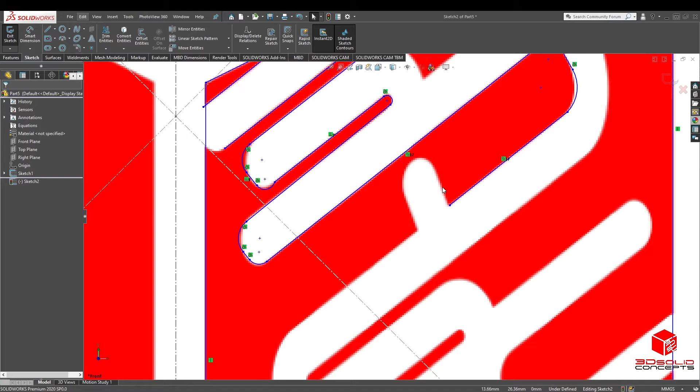This will be a series of step by step tutorials on CSWA level models. This course is also meant to help you learn a design intent methodology that will help you create smart 3D models that will make it easier for you to revise, increase your accuracy, and speed up your modeling during the examination. So, let's get right into the tutorial.

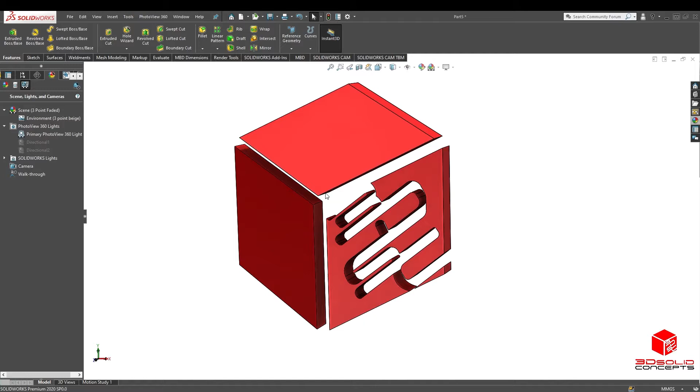What's up, YouTube? This time I chose to take off the intro and start off with just how I am right now. In this video, I'm going to show you guys how to do some offsets, some radius, and some holes in a part I think is a little bit more sophisticated than the parts we did before. So let's get right into it.

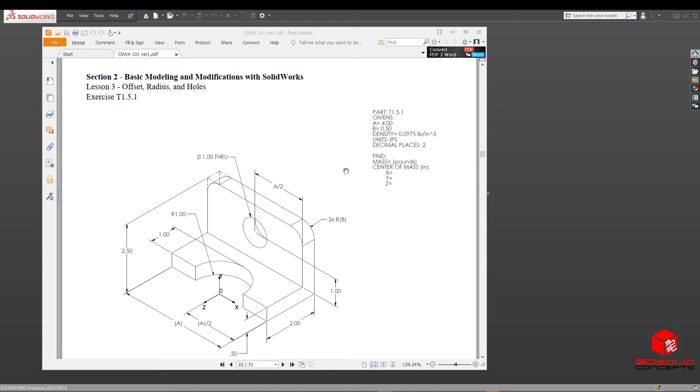So let's look at this part. We see that there's radiuses, this curved edge. We got a hole in the middle that is 1 millimeter through. Oh, whoa, actually let's hold up. This part is actually in inches and not millimeters.

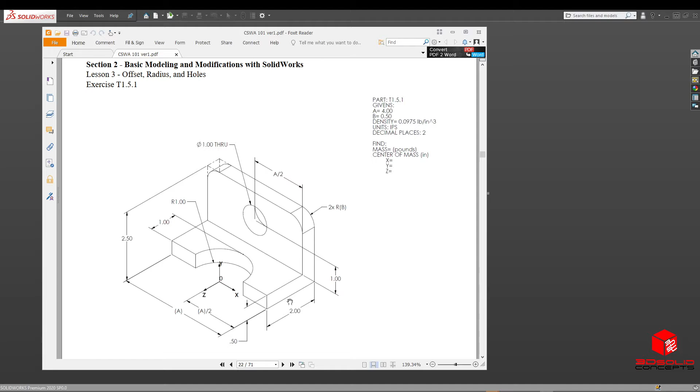So this time we get to figure out how to make a brand new template in inches. So let's start that first before we start looking into the part even deeper.

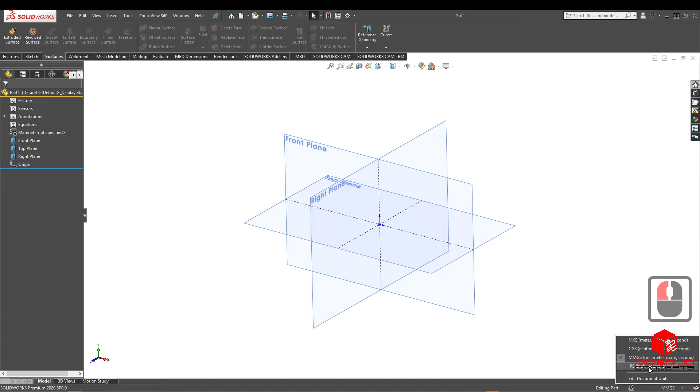So what we're going to do is File New. We're going to open our same millimeter part. Not going to do anything to it yet, but on the bottom right, you're going to change that to inch, pounds, and seconds. But that's not it. We're going to head up to settings, go up to options, document properties. We're going to head over to dimensions.

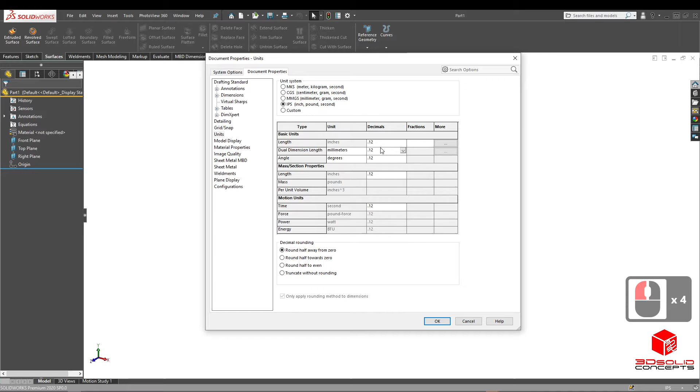Let's go to units first. You see how it's both in inches? We're going to change one to millimeters. Where are you, millimeter? There you are. Drop this down to 2 decimal places, and this one to 3. Then let's head over to dimension, and this looks all right. I think, yeah, that's fine.

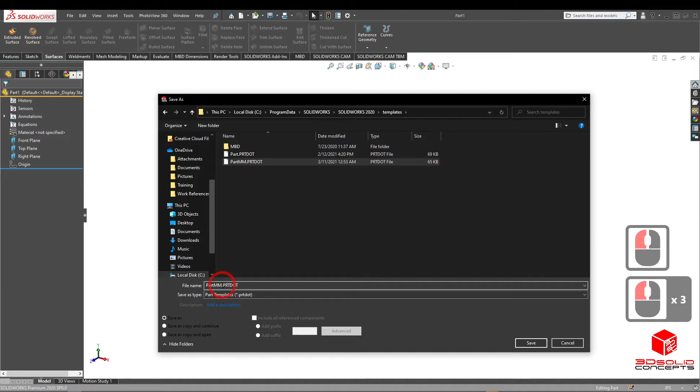So what we're gonna do is go File, Save As, and we're gonna go up to here. We're gonna go up to Templates, and if I remember this correctly, it's Part Templates right there. We're gonna take this and call it inch this time. Part inch, put a little dash there so we can separate the I and the T. Just hit save. Now let's close this one up.

Go to File, New. And we're going to make sure our part inches is there. Great. Let's open that up.

Now you finally look at the part. So this one is in inches like we've seen before. They want the mass in pounds, the center of mass in inches, and our density, and our A value is going to be 4 inches, and our B value is going to be half an inch.

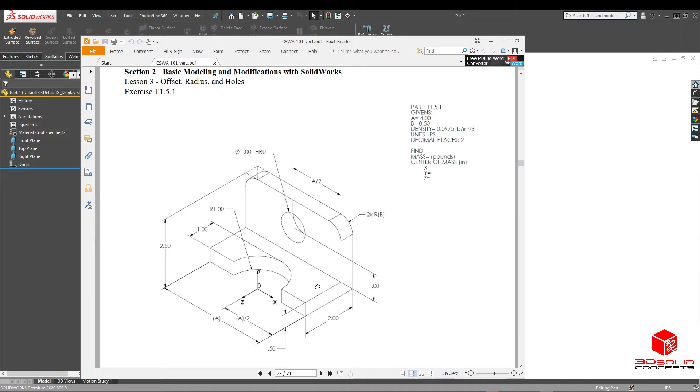So let's get into modeling this part. Quickly referencing where the X, Y, and Z is at to make sure Z is going down, X going to the right, Y going up. That looks all good. And it looks like this round piece is going to be the center of our origin.

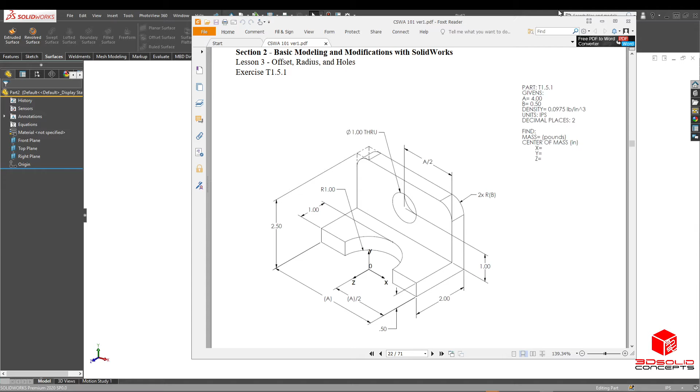So the first thing we're going to model then is this bottom base plate. Actually, let's try it one other way. I want to try doing it with this one right here. We're actually going to start with the profile and an extrude middle. So it's going to be 2 by 2.5, and it's going to be about half an inch thick.

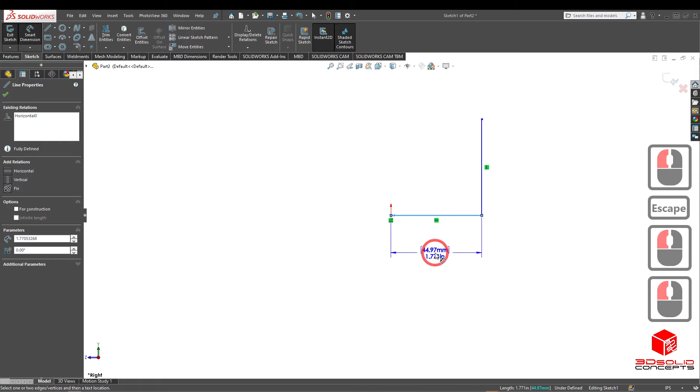So we're going to head over to our right plane. Just hide these. Go to our basic sketch, and I want to show you guys 2 tricks right now. This gives us some dimensions. I'm going to give one 2 inches. Actually, yeah, 2 inches. And then the other one's 2.5 inches.

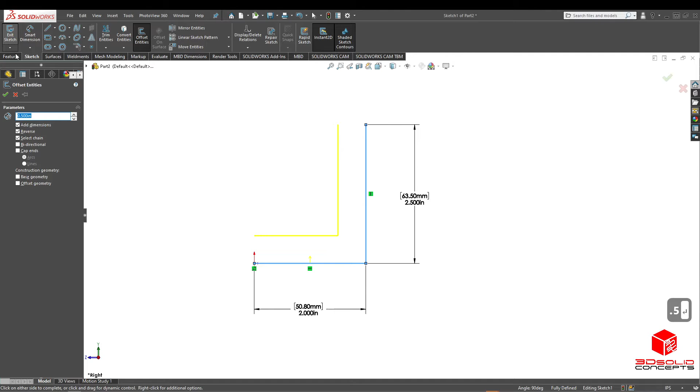So we're going to grab both of these, and what we're going to do is hit offset. This offset just offsets another sketch entity similar to what we have here, but with a dimension even across all the sketch points or sketch entities that you chose earlier. So for this one, we're going to choose 0.5 inches. That way we're going to close this right up.

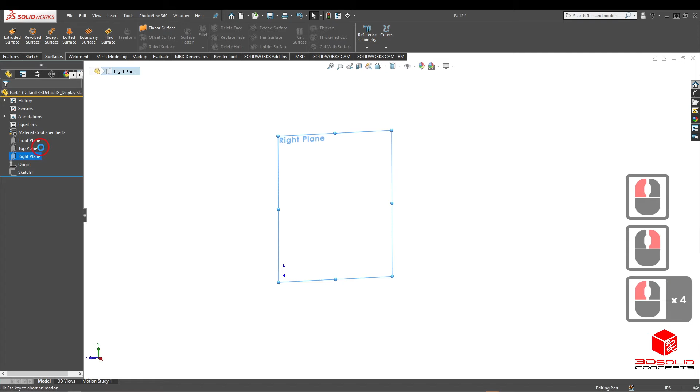And we have our sketch. Now, just quickly, we press the sketch here. You know, I'm going to try one more way of doing this. So another way is that let's get the same exact sketch points.

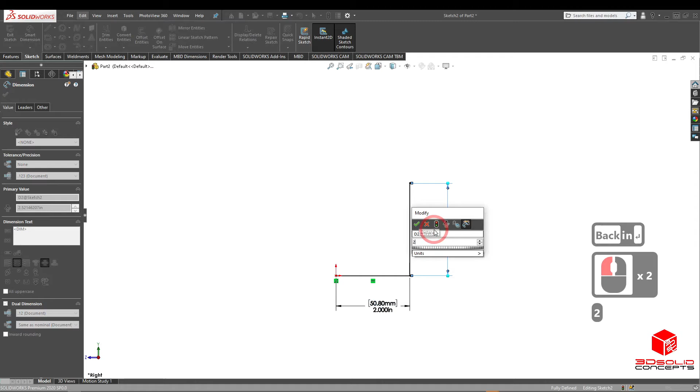Two inches. Oops, not 2.2. Two inches, two inches. And then this one's going to be 2.5. And then we're just going to go up and hit extrude boss.

What this automatically does is allow us to do a thin feature. In this thin feature, we could put 0.5. We want to make sure we're in the right direction of extrusion, I mean the right direction of our thickness. We're going to hit mid plane, and then mid plane it a value, which we don't actually have yet, but we'll put it in real quick.

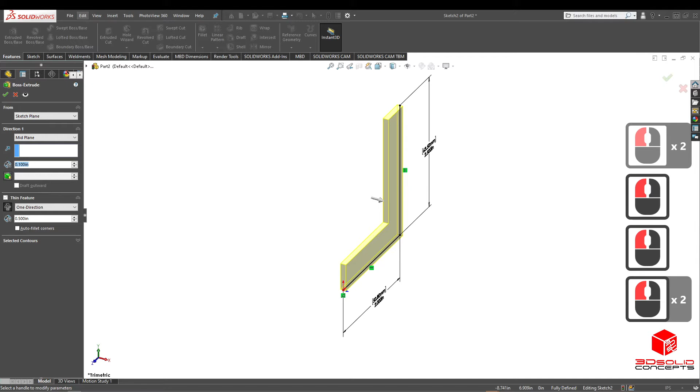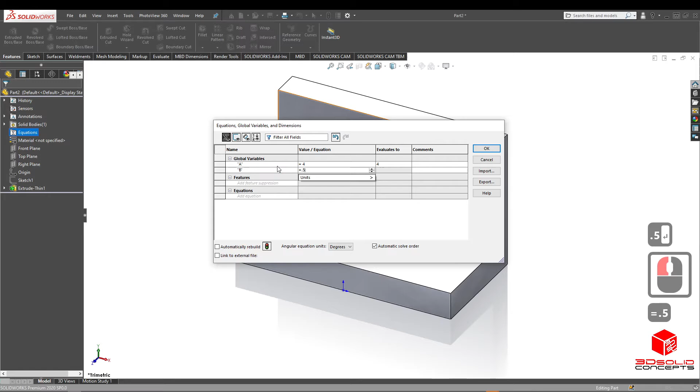We'll go back to our equations. Manage equations. Hit our A value, which is going to be 4. And then our B value, which is going to be 0.5. Press OK.

And then we could right click our feature and modify this dimension so it stays related to our equations. There you go, press OK. Now we got our part. Now we can head up to the top view.

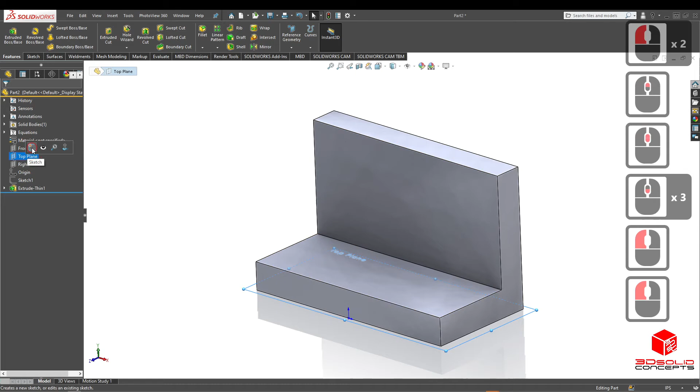What we could do is sketch that center circle. Go to Smart Dimension. But you see right here, it gives us the diameter of the piece, but we want the radius, so just press OK for now. Let's go to where it says right here: go to Value, Leaders, and then hit Radius, and it will give us the radius instead. So double click, 1 inch.

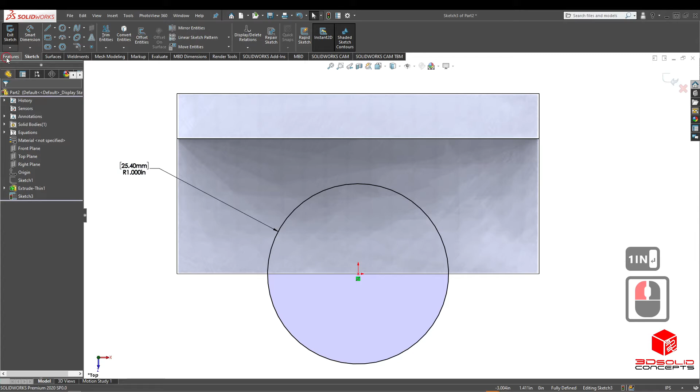Press OK, and extrude cut through all. Okay, great, now we got another hole here.

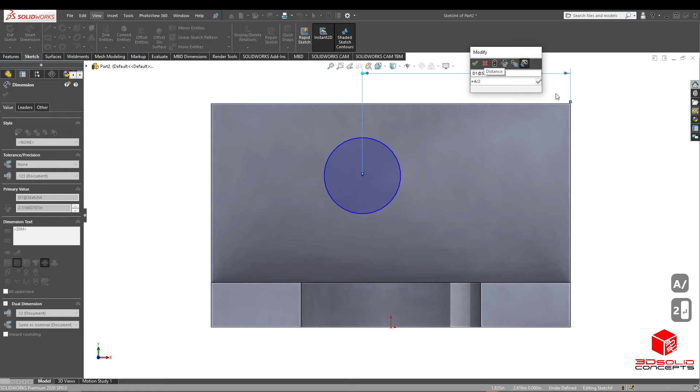So this one, we're going to dimension. This one's going to be an equation. So this equation, you want to put equals A divided by 2 - oops, sorry, put the A variable over 2. That'll put it towards the center. And we're going to add our 1 inch. And then this one has a 1 inch diameter.

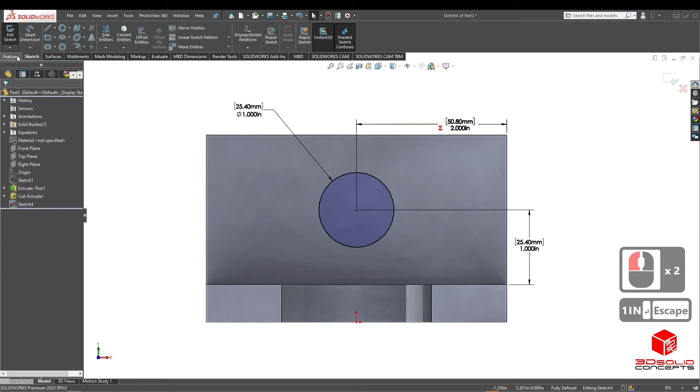So let's go ahead, extrude cut through all. And there we go. Now we want to go do something new, and this is called fillets. This fillet tool here allows us to curve or bevel the edge, this allows us to curve and bevel the edge on this.

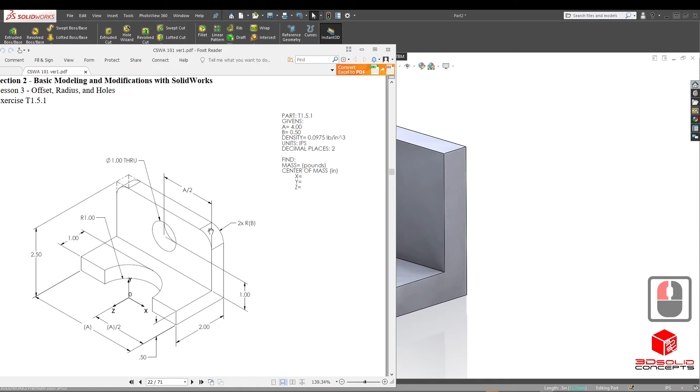So I want to talk about - now in this tutorial, we're going to require fillets. So this fillet tool allows us to bevel and round off edges. So for example, we click our fillet tool right here under features.

It wants us to select an edge or face. You can also click the face. You can see all the clickables that you can do: edge, faces, features, and loops, just by hovering over the box.

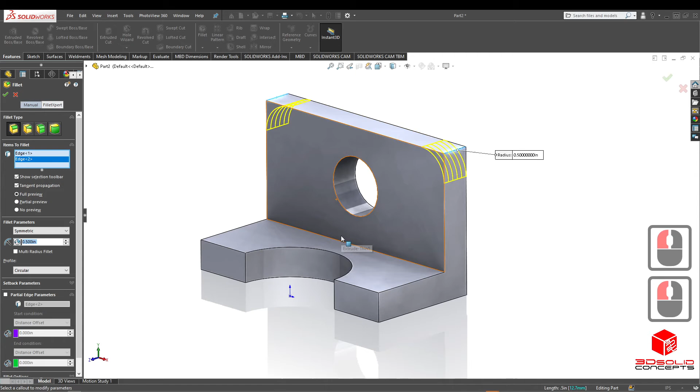So for this one, let's first input our value, which is going to be equal to B, and we're going to click both the edges that require this radius. That looks good so far. Let's press OK. And there we go, and there we got our 2 edges.

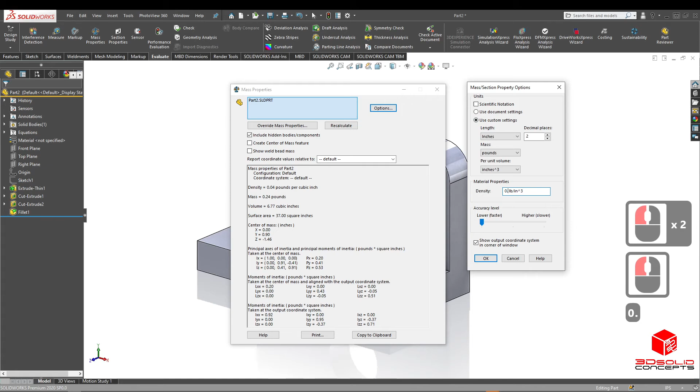Now all we need to do is add in our density, which is 0.0975 pounds per inch cubed. So let's go to Evaluate, Mass Properties, Options. Go to our custom units, and for this one we're going to type in that number, 0.0975. Great, that looks good.

And this time I actually have the answer sheet in front of me - well, not in front of me, let me pull it up. And looks good, 0.66 pounds.

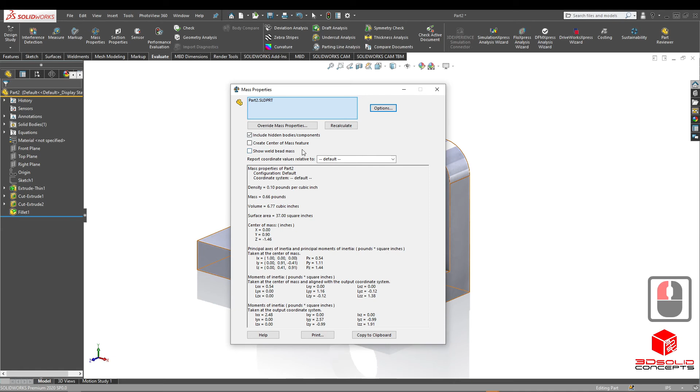Success! Okay, so now let's go to the second part of this. The fun part - I think it's fun. I'm pretty sure you guys think so too.

So let's double click the first one. We're going to call this T1.5.1. We're going to add a second configuration, add a configuration, T1.5.2.

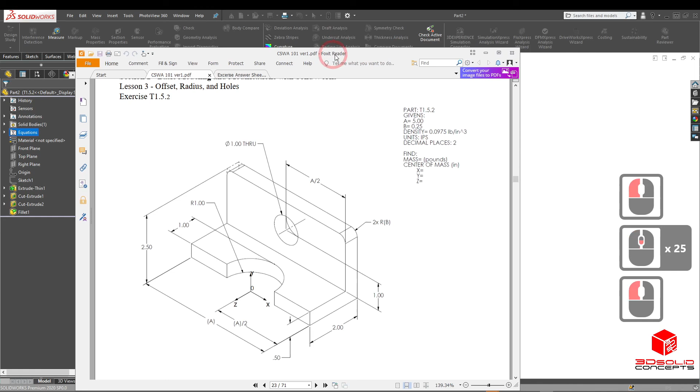Press OK. Head over to our equations folder, manage equations, and if we did everything correctly, this configuration we're going to type in our configuration number, and our new one - let me see what the new one is. The new one is going to be 5 inches and 0.25 inches for the B. 5 inches and 0.25. Press OK.

That looks exactly right. Let me just give it a quick tour. And evaluate mass properties - it looks good. Perfect, so that's our next successful part.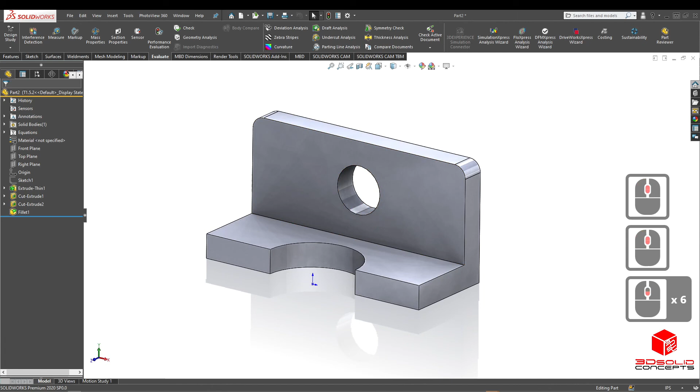So in the next video, guys, we're going to have a similar part to this one with some holes, a flange, and maybe some dual walls. So in the next video, it's going to be a very similar part to this with holes and thin features. I'll see you guys in the next video.